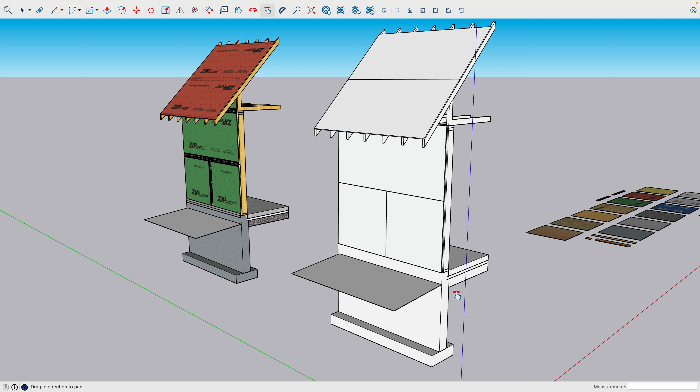As exciting as that is, it's maybe not the most helpful thing to most folks who just see this as a big white stick model. In many cases, applying texture, product names, and even the graphics of tapes gives your team the affordance of what materials you want them to use, especially when you want them to understand.

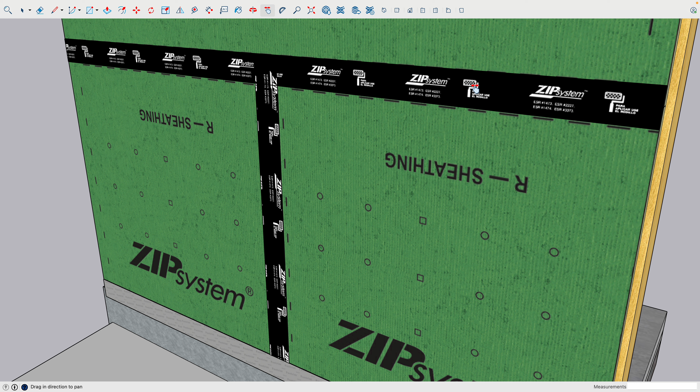In this case, you're using Zip R6 sheathing, which we'll tape to the foundation with Siga Fentrim, a primerless tape that bonds to sheathing and concrete—a wonderful product. You might specify a 4-inch zip sheathing tape as well, and maybe a 1/2-inch zip roof sheathing, or in our case 5/8 roof sheathing, communicating to the team: the reddy brown stuff goes on the roof, the green stuff with insulation goes on the wall, black tape on the zip sheathing, and the gray stuff goes at the bottom.

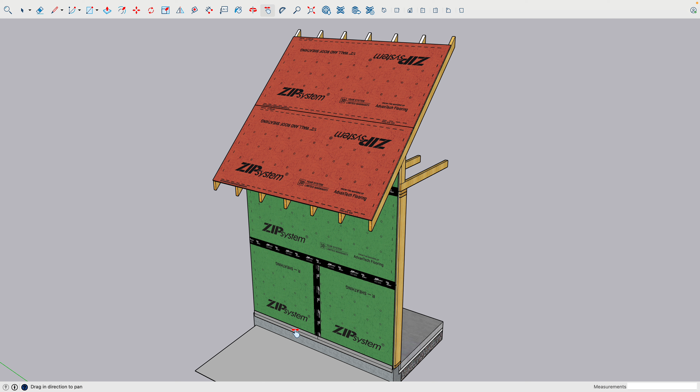Not everyone's familiar with the names of zip tape and Fentrim tape, and these things might be new to them, so colors and textures can give people a lot of support here.

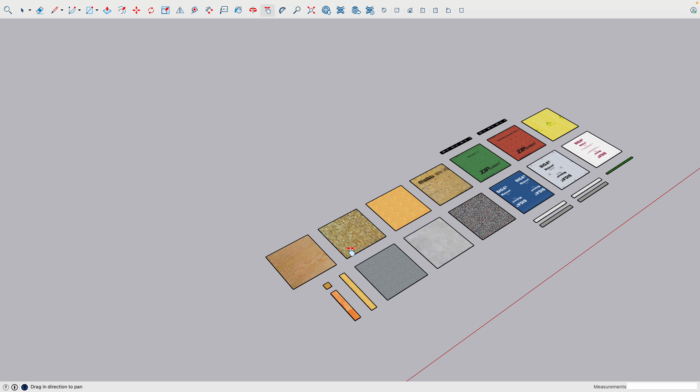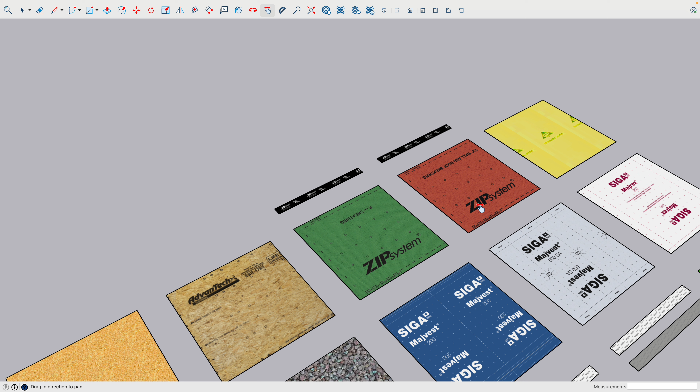In your file, you're given a bunch of textures, pre-scaled. We have plywood, OSB, particle board, and Advantech subfloor sheathing—this one is 3/4 inch. We have 7/16 zip system sheathing, and in this case 1/2-inch, but you can use the same hatch for 5/8 roof sheathing. We also have a hatch for DensGlass from Georgia-Pacific.

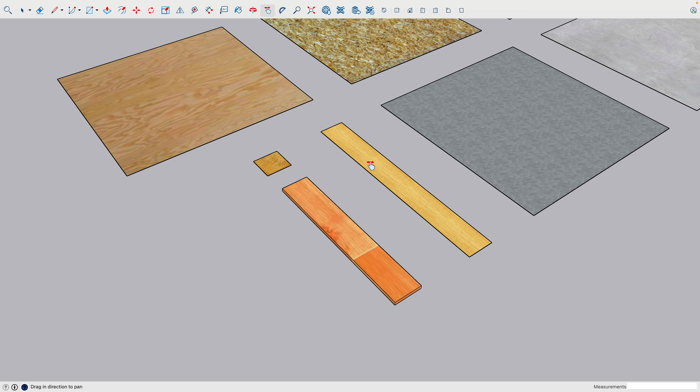For membranes, we have Siga Majrex, an interior membrane, and 500 SA, mechanically fastened, from Siga as well. There's also some gravel, concrete, conventional lumber, and this orangey one you can use for LVL.

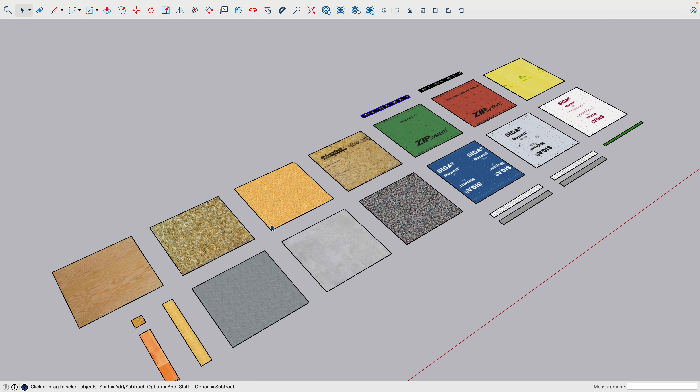Then there are some tapes here: zip sheathing tape, and for Siga's product line, Wigluv, Fentrim, and Rissan. So for today, we're going to be using zip system 7/16, 5/8 for the roof, some zip system tape, and some of the other sheet products. Let's put those into play here.

These swatches and colors don't come with SketchUp, so we have to make these ourselves. I've made these for you and put them in your file. As long as you have these textures—so if you copy and paste them from a different model into this model—it's going to give you this option.

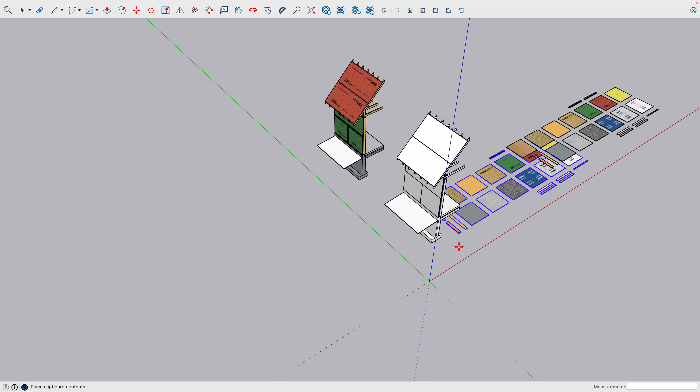When we go up to Window, then Materials, you'll notice the material menu with some default materials. If we go to the drop-down menu and select Wood, there are some lovely wood textures, but none of them really resemble things you might find in a building yard—though they might work okay. You won't find zip sheathing, Advantech, Siga's materials, or the plywood sample I have in here. It works in a pinch, but they're not the most representative of building products.

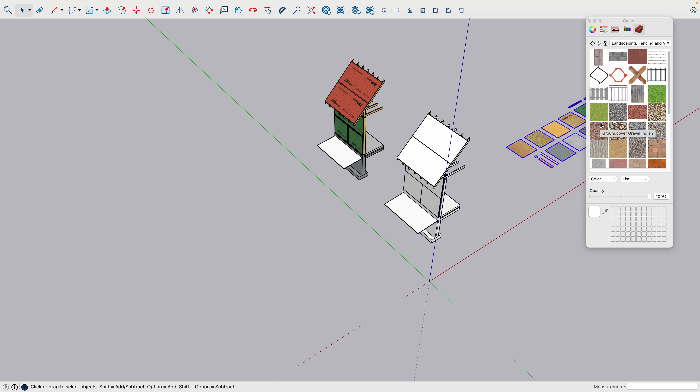Because you've copy and pasted the swatches we provided, if you go to Colors in Model, this is where those unique textures show up. As long as the swatches are in the model, they're now available to you as a color palette. So that's the first thing.

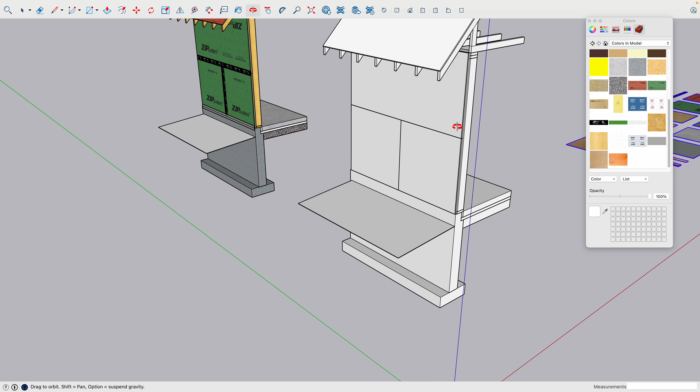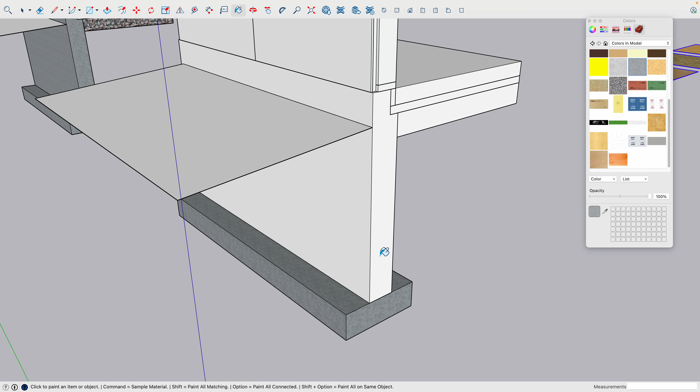Let's add some texture here, starting really easy with the foundation—we'll simply use what we're going to use for concrete. We go to Colors in Model; if your material swatch isn't open yet, go to Window, Materials, Colors in Model. We click on the dark gray concrete swatch and use that for our foundation. Wonderful. Because we want a capillary break under the slab, we use the gravel texture. For our slab itself, let's use a light gray material.

It's a different pour, maybe a different consistency of concrete, so we're kind of denoting that it's different here. And then my insulation, if you're using EPS, it is white, but it doesn't really give the affordance that it is a textured material.

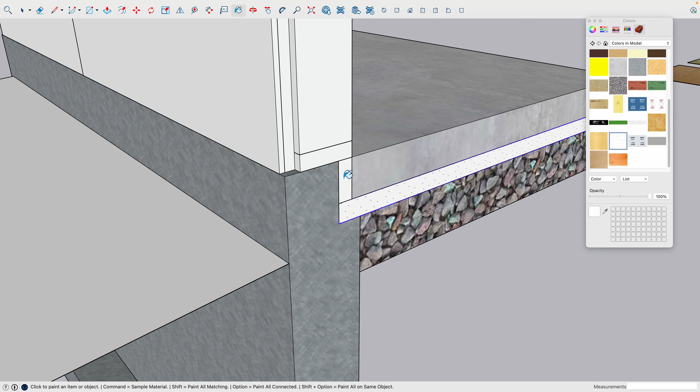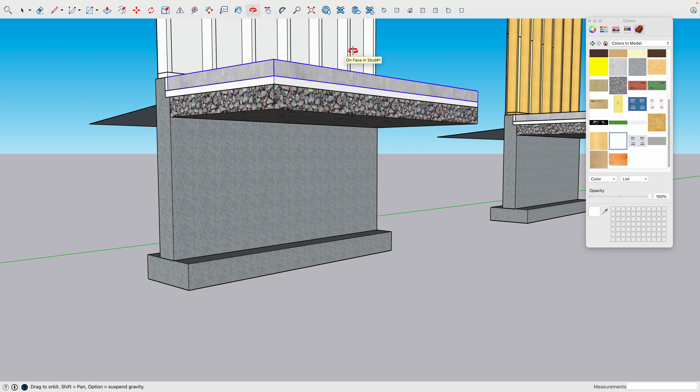So we're going to use this kind of dot hatch pattern and bucket those. When I bucket a group, that bucket applies it to every face of that group. In this case, I've grabbed this slab assembly, moved it up so you can see the bottom of it, and I orbit down. You'll notice it actually colored all 6 sides.

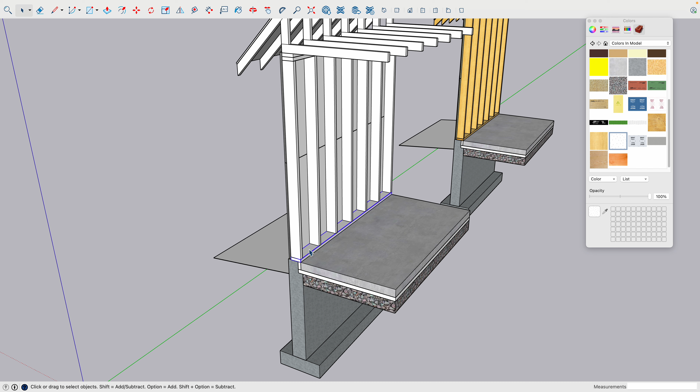If I click on the bottom plate, in the previous video we learned how to make this a component. So if I click on that bottom plate and click on the top of it again, double click into the group, and select the end face, you'll notice it also highlights the ends of the other 2 matching components, which is very helpful. So if I click out, and simply click it once, it selects all 6 sides.

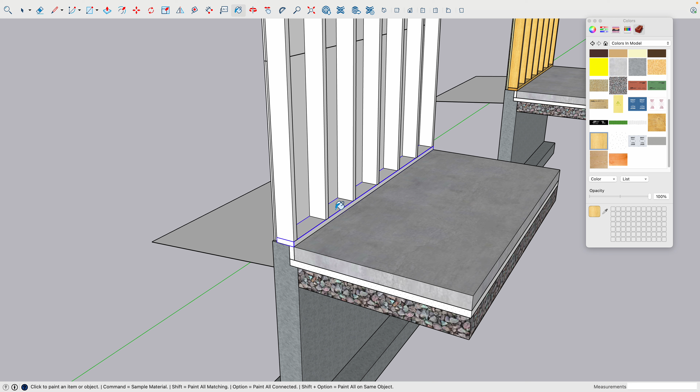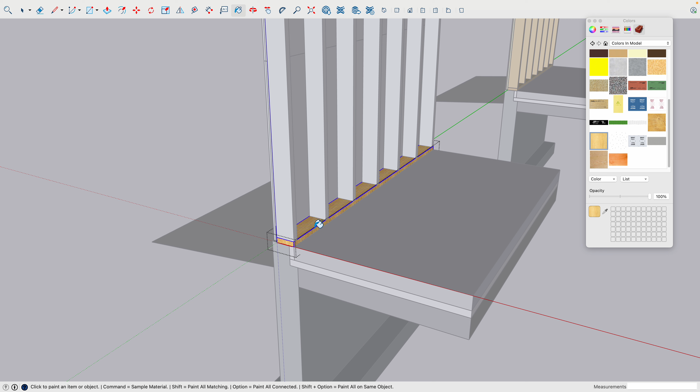I'm going to use this kind of wood texture, looks like a wood grain, and paint bucket. Let's select all 6 sides here and hit the paint bucket to get that wood. There's a bit of lag here in my computer. Okay, so if I have all 6 sides selected by triple clicking and I paint bucket, it's going to color all 6 sides.

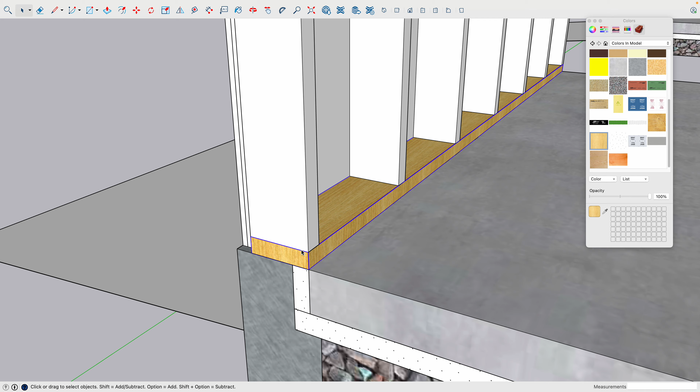That might be good depending on my level of detail. You'll notice here, because it's a component, it colored all 6 sides of the other 2 top plates. Now wood has grain and direction, so if I want to be a bit more clear that this is dimensional lumber, I double click into this group, rather than triple clicking which does all sides, and simply select the end.

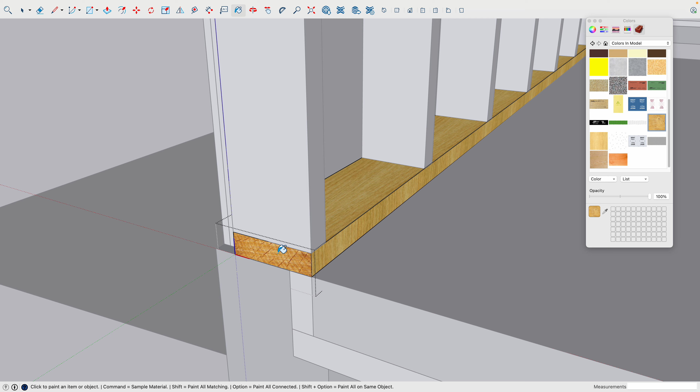I then can go up, and I've given you an end grain texture. Select that paint bucket, and bucket the end. What that's going to do is, you go up to the top, it also put an end grain on these matching 2 pieces. So it's a small detail, but it does give more affordance that this is dimensional lumber.

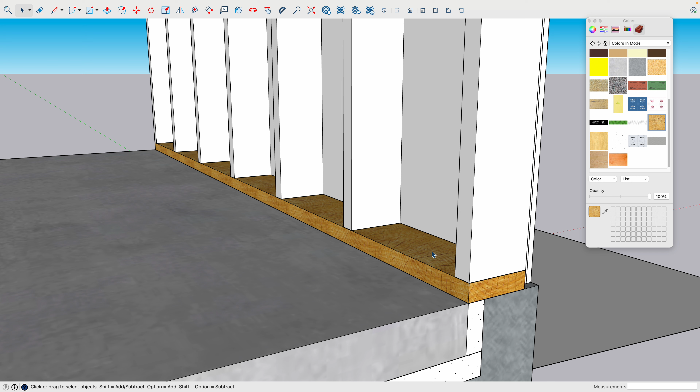So I can rotate around here. Again, I could apply that texture to all 6 sides, some lag here. Okay, I could apply that to all 6 sides, but that's really not what a 2x6 looks like. So I want that large predominant texture to be applied first, that wraps that surface in the 4-sided material, so I'm not doing it to all 4 sides.

I then go in individually to the sides that are unique, click on the different texture, just color those ends, orbit, flip around, go into the end here, select just that end, see how it's hatched here but not the sides. Again, grab that wood texture, the end grain, and hit the end.

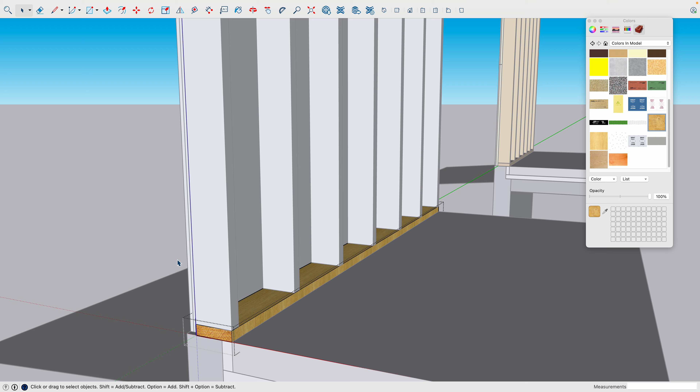Okay, same thing here on my studs. I'm going to select that component, select all 6 sides, paint bucket. Okay, works pretty well. Again, because they're components, I'm not doing all this work again.

For my roof truss, very similar. Because the predominant texture wrap is going to be that wood texture, I'm going to select all 6 sides, grab that wood texture, and paint bucket, and again it does it to every single surface of that component.

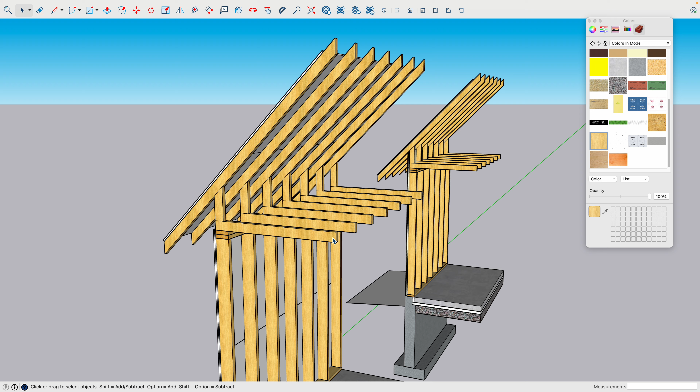Now, the bottom chords are also dimensional lumber, so I'm going to click into that component. You'll notice that every end is now hatched. That shows you that you've used component successfully. I'm going to click on that hatch pattern and just do the end.

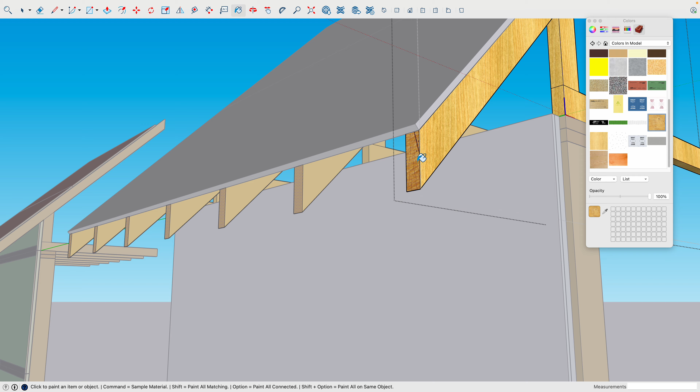And I'm going to repeat that process on the ends of my rafter tails. So I'm just going to select this one now. Same thing, do that one. Then I'm going to rotate up to the top where I have one more. Oops, not that. And there we go, you got end grain.

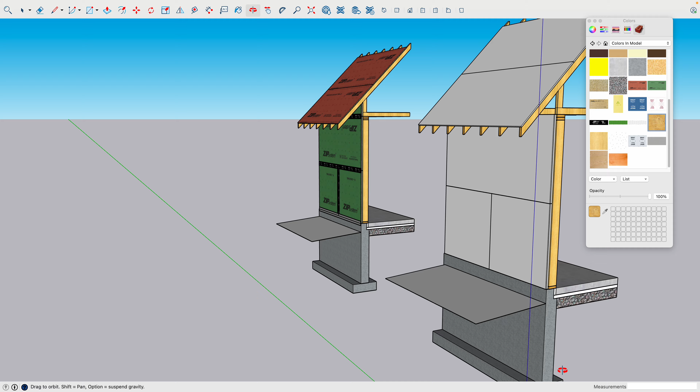Okay, so now in a couple minutes, we've got foundation. This is already more clear. This is doing a much better job communicating how this building is assembled, and for younger team members, gives them some affordance of what the materials are.

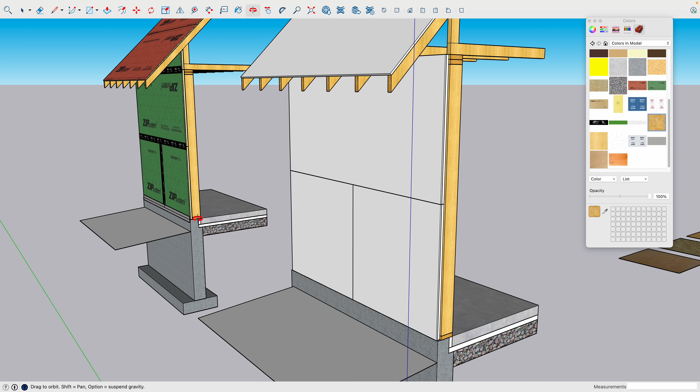Okay, pretty killer. Let's do some sheathing now and have some real fun. So wall sheathing for something like ZIP is pretty specific. It's easy to identify at the yard, it's printed, it's green. So let's make our sheathing here also reflect ZIP sheathing.

ZIP sheathing is two components, especially ZIP R. We have this integrated WRB that's printed and adhered to the face of the OSB, and then that is glued to this layer of polyiso. That's what makes it ZIP R, that's the insulated sheathing part.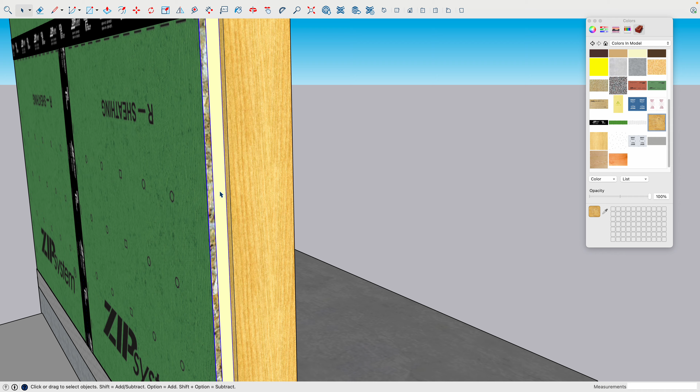So we're going to make this our sheathing. For the polyiso component behind, I'll click this first smaller half sheet, then double click again to select just the back polyiso piece. In this color lineup, there's a yellowy color here you can use for polyiso, not quite white, not quite yellow. Triple click to get all 6 sides of that shape, then paint bucket that.

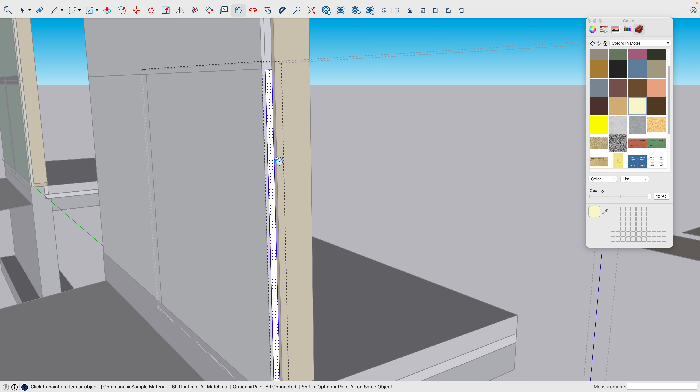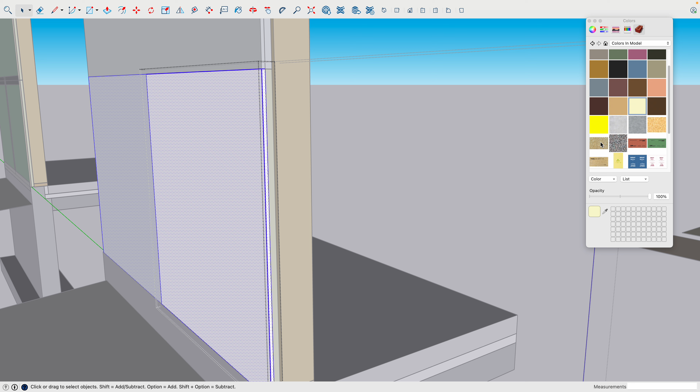For the building face itself, this is now the sheathing. I can triple click to get all 6 sides of the sheathing layer of that component, and the bulk material I want to wrap all 6 sides with first is this OSB texture, which is oriented strand board. But we know that zip sheathing has a unique face to it.

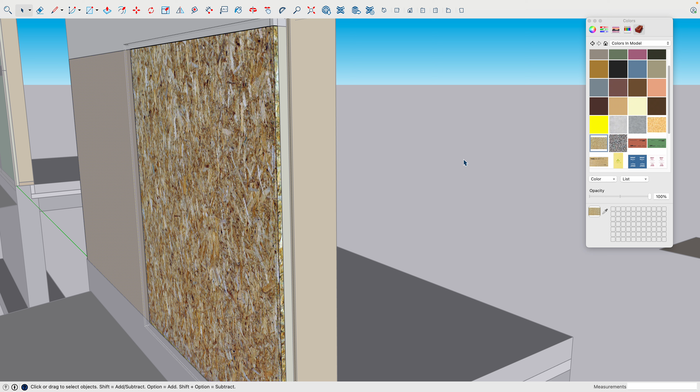So once I've painted all 6 sides of the sheathing layer, I then just select the front face by clicking on it once more, then one more time, and you notice now it's just selected the face. So if I go back to the zip sheathing material and paint bucket, it just does the front.

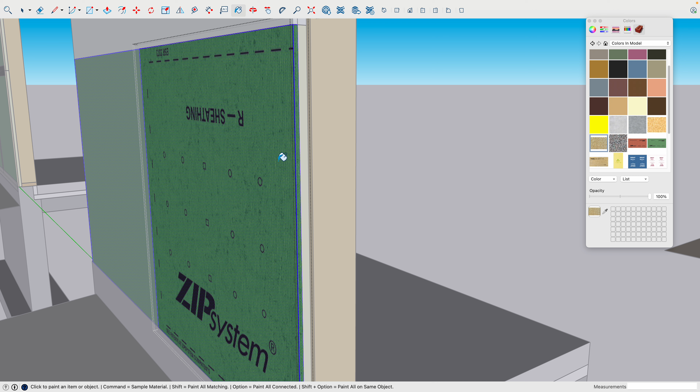If I had all 6 sides still selected - see how the front here is hatched and so is the side - and I went to my green bucket, it's going to wrap all 6 sides. I don't want that. I want the edges and back to be OSB, so I paint bucket that first. I then select just the front, get my zip sheathing texture again, and paint bucket just the front.

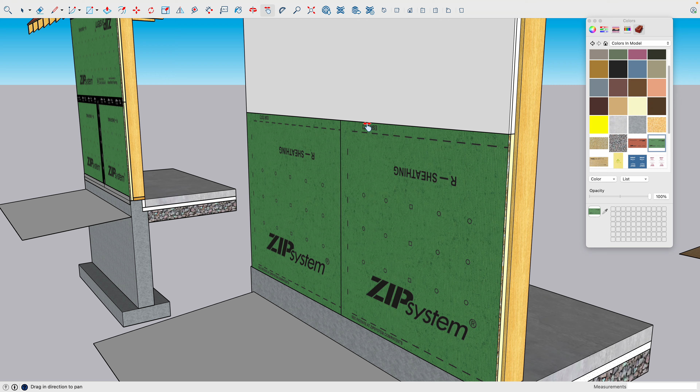Okay, now if I double click out, boom, components, right? Because I made components of a half sheet - the unique version of that full sheet - I'm able to duplicate my work. The top one is the same process.

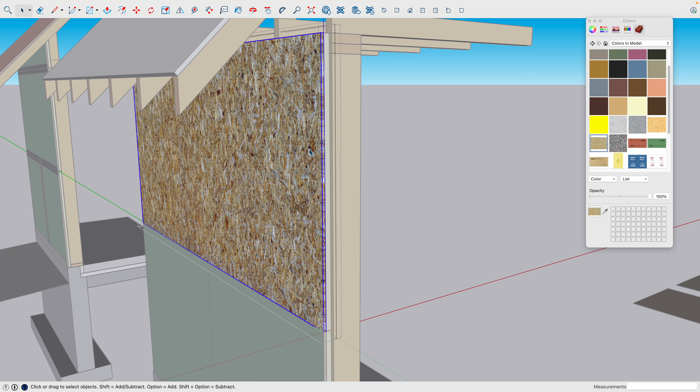I'm going to select all 6 sides of that back group, go to this kind of gross yellow color for polyiso. I'm then going to select the front copy, all 6 sides of it, click on the OSB texture, select just the front face, and then drop the zip on there. Already this is doing wonders for us to communicate what this sheathing is, what product you want your team to do, and maybe even the sheathing layout you want them to mirror.

Okay, let's do the roof now. Roof is pretty darn the same. We're going to select this roof sheathing. You'll notice here, when we copied this, we did not make a component - we simply moved and copied it.

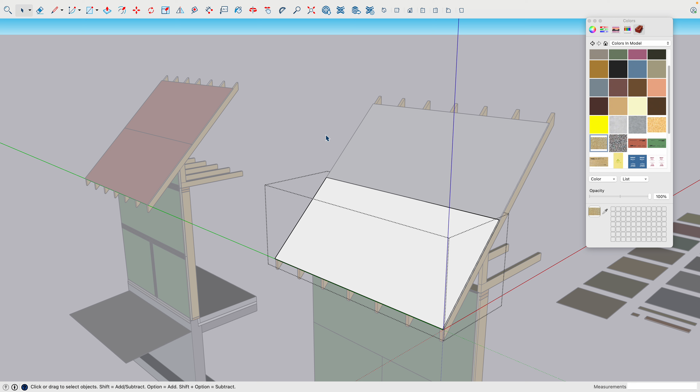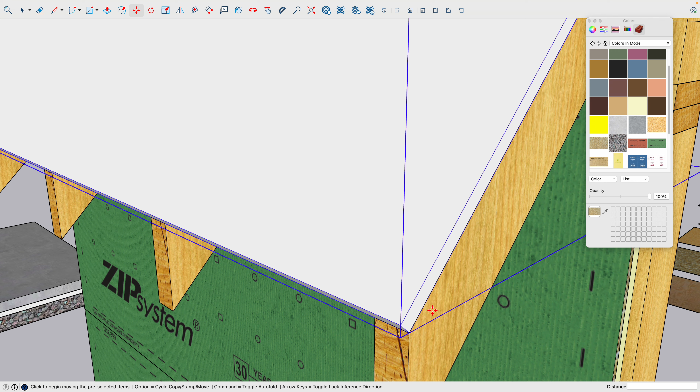So if I go in here and apply all my texture, it's not going to copy it. If I made that mistake, I could simply grab that upper sheet, delete it, right click, make that a component, and call that 5/8 roof sheathing. I then go in and move-copy - M option, or move control on a PC - to move and copy that up so I have 2 components of that zip sheathing, so when I do this work, I don't have to do it twice.

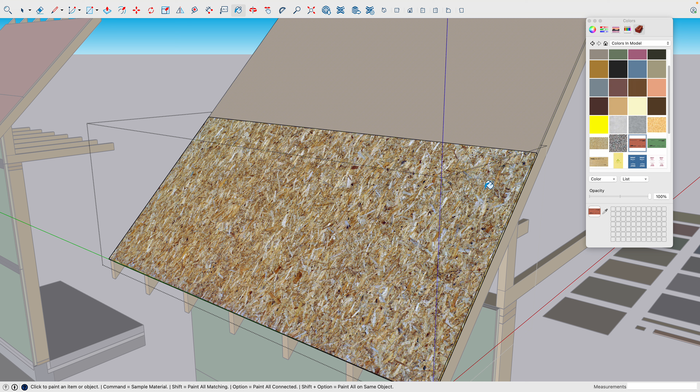So now I go in and select that sheet, all 6 sides - triple click to get all 6 sides. I paint bucket that first one because I want that texture to apply to all sides of that OSB. Now I just select the front face, hit spacebar to exit that command, select the front face, then pick my roof sheathing texture - the kind of orangey, browny red one - and paint bucket. There we go, so this is working pretty well.

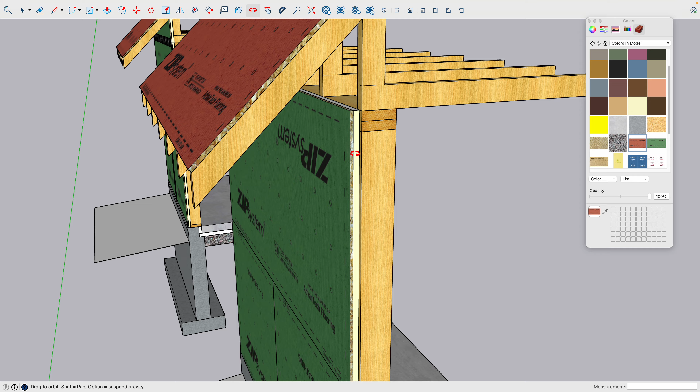This now communicates, you know what, it's a different product on top, different product down below. We've textured or at least added some color to that polyiso so it's not quite white, and even down here with our EPS layer, we've textured that with a hatch to show this isn't just a white box, something closer to EPS. The last thing we can do here is start to show our team members, and we'll do this in future workshops.

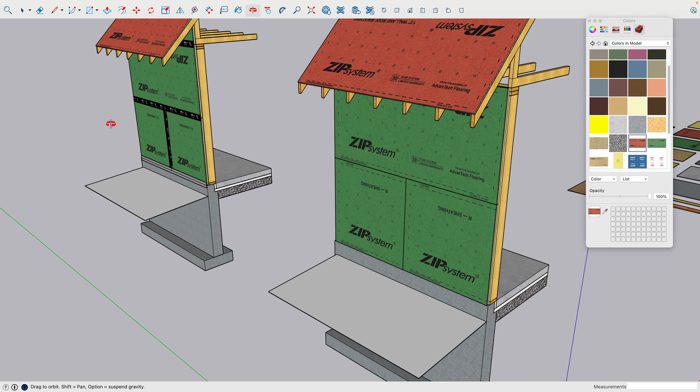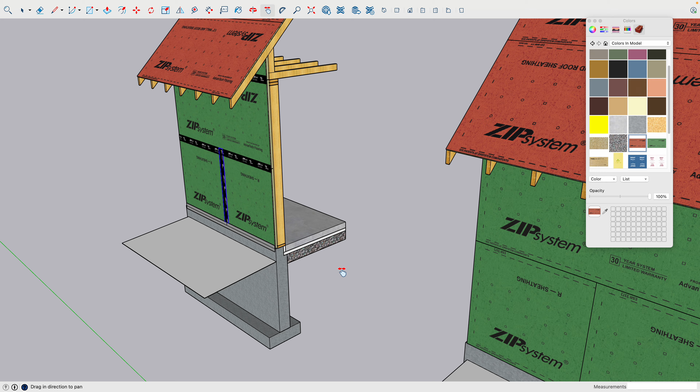We're going to go into our model, and I'm not going to select any group. I'm going to draw on the face of these groups using a guideline, so hit T for tape. I'll find that horizontal seam in my zip sheathing, click on the edge, and pull up in the blue axis. I could hit the up arrow to stay constrained, or just go up. I'm going to set that guide 2 inches off that seam, and you notice it aligns with the texture. We've scaled the texture so it fits perfectly on a 4x8 sheet.

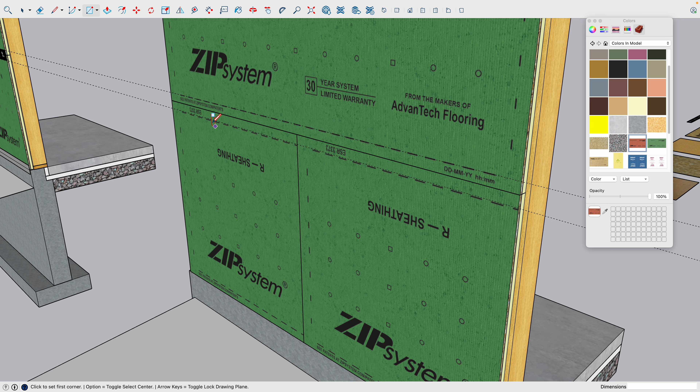I'm going to snap again from that seam line, come down in the blue axis 2 inches. Then I'll go to rectangle and trace from where the guideline intersects the outside edge to where this guideline intersects the outside edge. It of course makes a new surface because I've drawn on top of those groups, not in the groups. So now if I triple click this new surface and boundary, I can right click, make group, double click to select it.

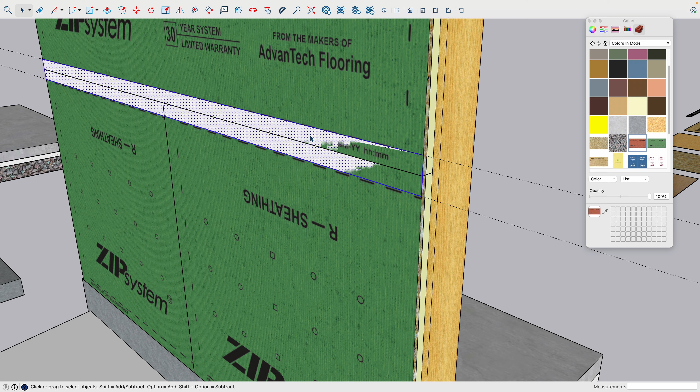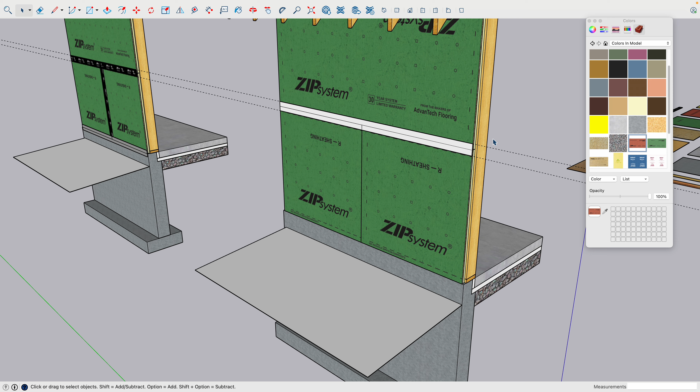Let me try it again. Double click to select it, hit P to push, and we're going to push it out 1/16, so 1/16, enter. You'll notice that if I don't apply thickness to something like tape, even though tape has almost no thickness, SketchUp doesn't know which surface we want it to currently model.

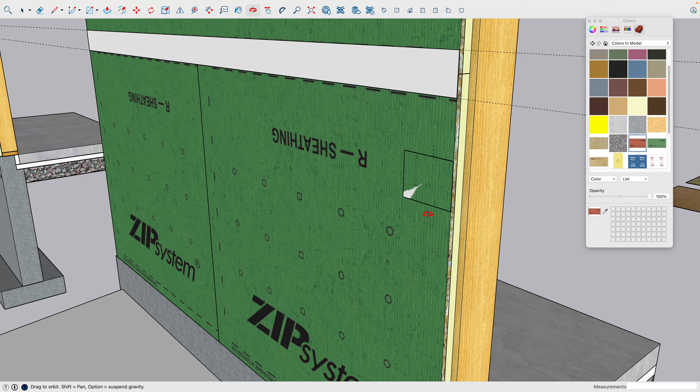Do we want it to show the green layer or the white one? Because they're in the same plane, occupying the same space, it kind of has a panic moment and shows you both at once. Not so helpful. If we were to go in here and apply our zip tape layer to that, it doesn't really work, right? It's also why sometimes it's hard to select, because you're selecting the same plane.

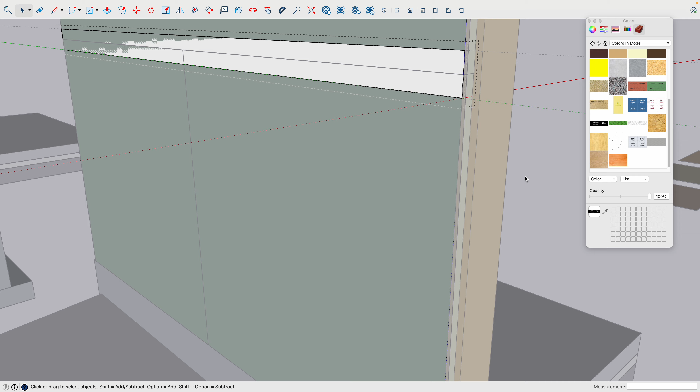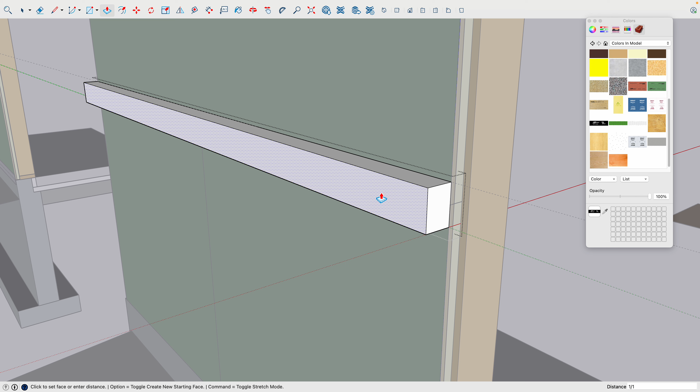So instead, when we made that first outline, pivot around until you can see more of that white shape. When you double click, you're selecting the surface and the boundary of that new plane. Right click, make group, double click, P for push, and we're going to give it thickness, 1/16. This means we've drawn basically a very flat rectangle in front of our sheathing, and that's going to allow us to apply texture.

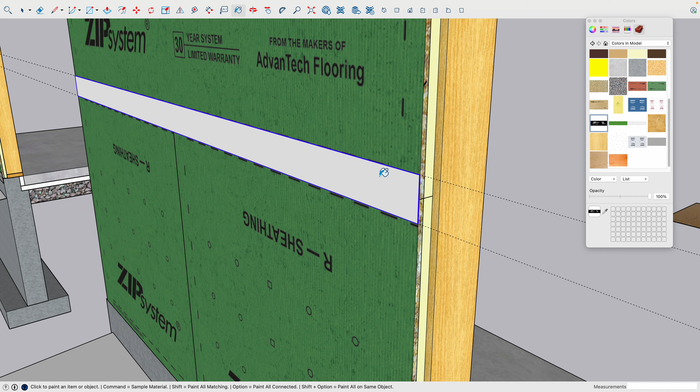So I'm now going to select all 6 sides of it, click on the zip tape material swatch, wait for my paint bucket lag to process, and then click, and boom, okay? You have just flashed your first sheathing layer or sheathing seam line in SketchUp. There you go. Let's do the bottom now.

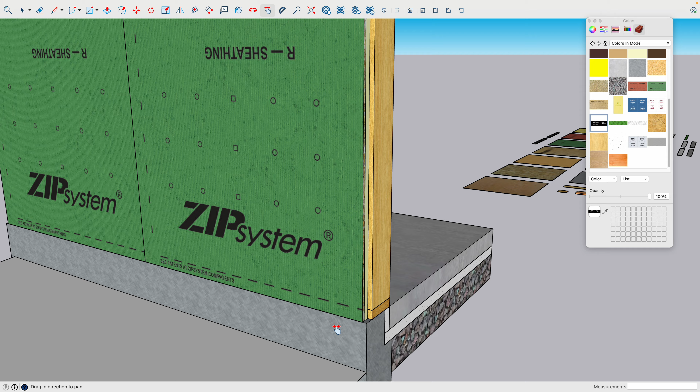Let's use some fence trim down here, something a bit different. I could do the same thing, come down here and do my same alignment, come up 2 inches, enter, come down 2 inches, make a shape, but I don't have to do that. I could simply go and grab this layer of zip tape, click on the group. The blue boundary is going to help you find it. I'm going to hit move and copy.

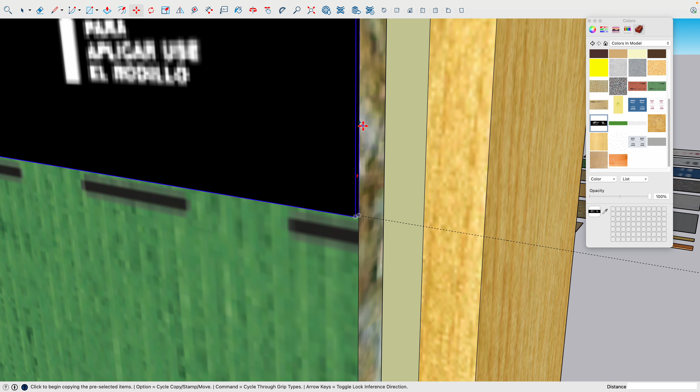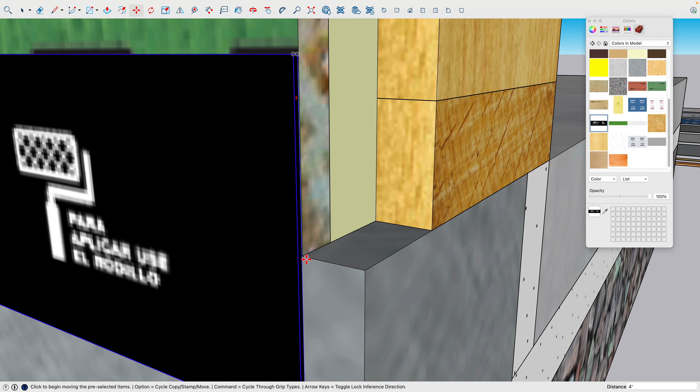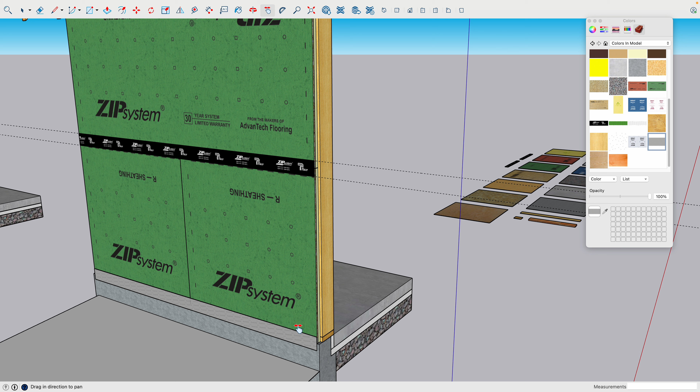Depending on the scale of your model, since I don't have this piece of tape replicated anywhere else, I don't have to make it a component yet. If I'm doing an entire building, I probably want to do these separately. Now let's do this last piece in the middle here.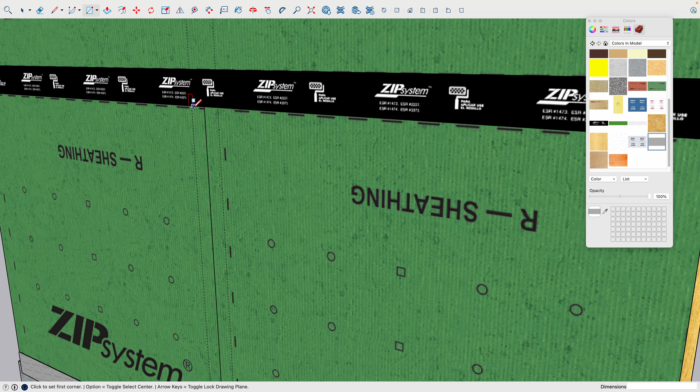That's the same process again. I hit T for tape, come over 2 inches in the green axis, go over 2 inches again in the green axis. I hit R for rectangle, go in here, start from here, and come down to the bottom. There we go.

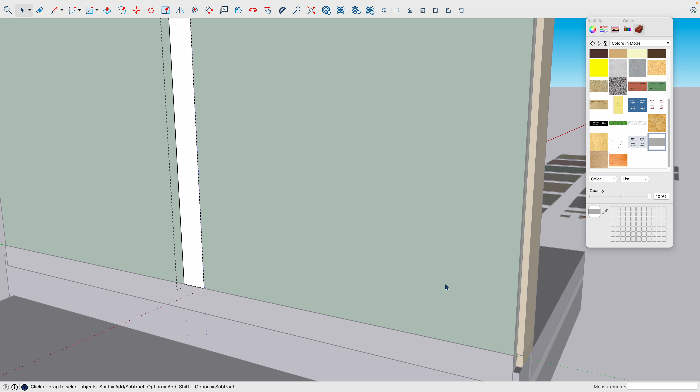Orbit until you find a bit more of that white showing, so it's easier to select. Triple click, right click, make group. Double click, select the face. P for push, pull it out 1/16 - tapes need thickness to really see them. Now select it, apply your zip tape, and there you go.

You'll notice here, SketchUp doesn't know that's a single graphic - it sees the image of the zip system tape as a texture. It doesn't know you want that tape to actually run vertically.

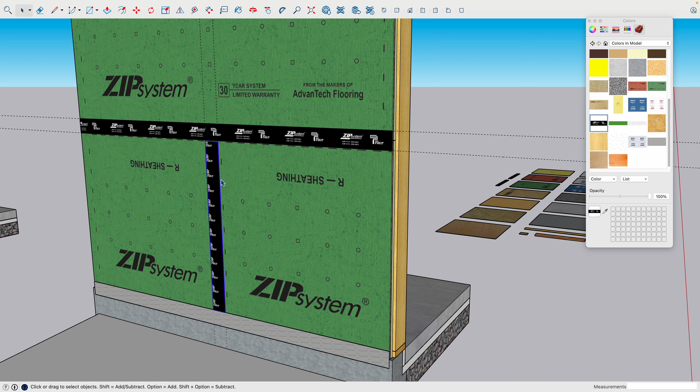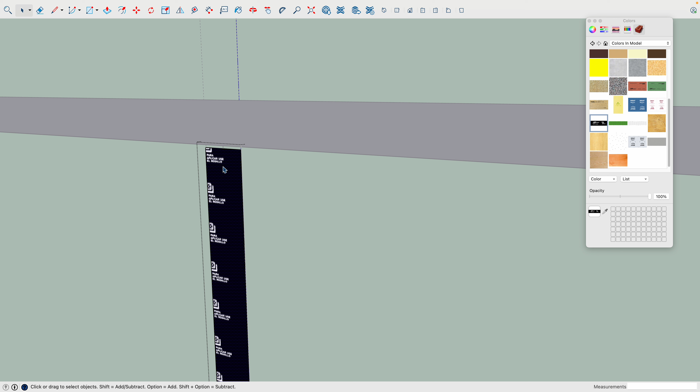So what we need to do is rotate this last texture. To do that, I have to change the operation. Right now we've taken this hatch and applied it to all 6 sides, because when I triple clicked that shape and painted it, it wrapped it on all 6 sides. So when I select this front face only and right click, I'm not given the option to change the texture. When I want to rotate or adjust any texture's orientation in the model, I have to apply it to just one side of the sheathing.

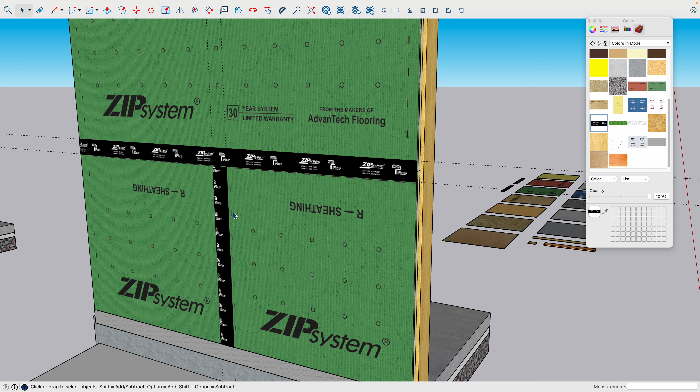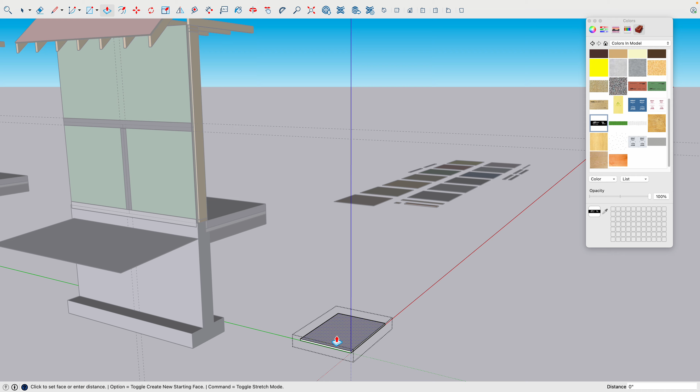Let me show you how I do this on a little model next door here. Let's make a block - just a rectangle on the ground, like so. Double click, right click - oops, triple click, right click, make group. I'm going to push it up, let's push it up here, I don't know, 2 feet. Okay, so we've got a square.

Big old square. I triple click all 6 sides and apply, let's use the zip sheathing so you can actually see it. Okay, and it wraps the box. That might work okay for us, but let's say on this front face I want to run that sheathing vertically - I probably want to show the sheathing texture going up the wall versus side to side.

So to do that, I have to select just that front face I want to rotate, and I'm going to paint bucket it again. Okay, just the front face. Now, when I right click with the paint bucket tool on, after painting just that face, a new dialog shows up - a texture dialog called position.

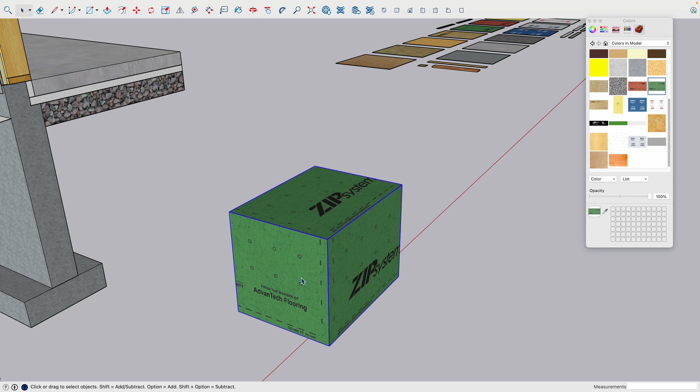You'll notice on the sides that I didn't paint on their own, if I right click them, it's harder to change that position. So I need to select that face only, apply that texture, right click, go to texture, position, okay?

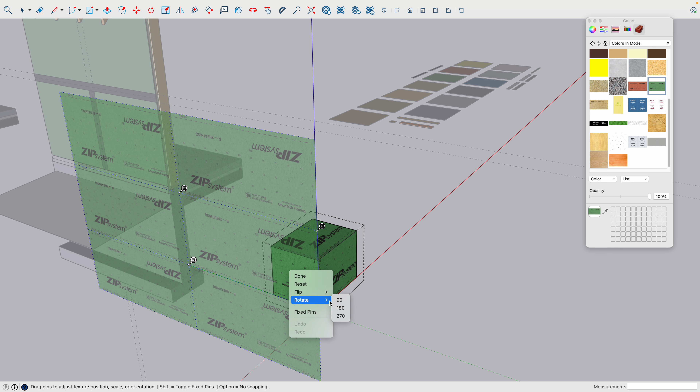Now you can see that's the full swatch, what it looks like when it replicates. And now I right click again, go to rotate, and rotate it 90. So now that swatch is going left to right on the side and then up and down on that front face. So let's do that to our tape here.

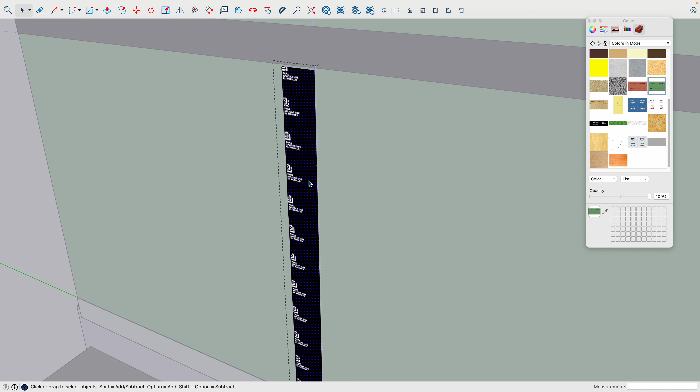We're going to double click into our group, select just this front face - and I can verify that because just the front face is hatched. I'm going to make sure I've just paint bucketed the front with that texture. Right click, texture, position, right click again, rotate 90.

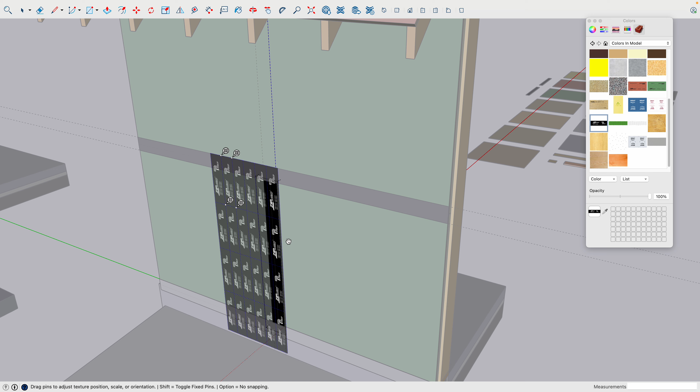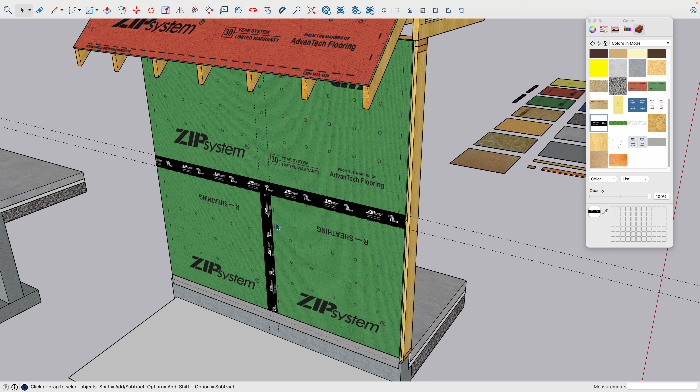Okay, zoom out to verify it's good. Hit spacebar to deselect, then click out of the group. Now I've successfully rotated the tape, showing your team I want this to roll this way. Using that texture rotate tool might be helpful for you, especially with textures that have graphics and lettering that reads left to right.

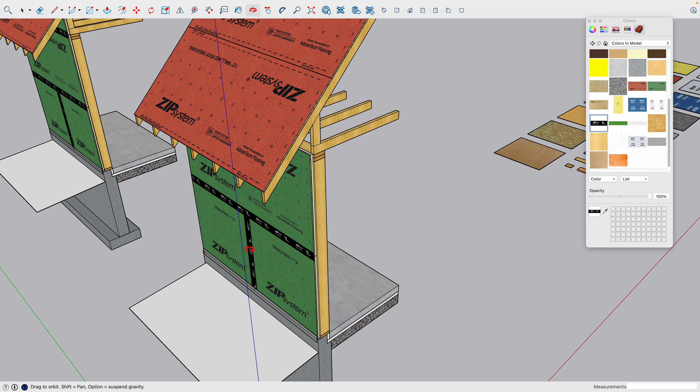Okay, so that's the end of this assignment. Again, you want to go up here and clean up your model - edit, delete guides - so that your finished model has a textured foundation, slab assembly, wall framing, truss framing, roof sheathing on top, and wall sheathing down here. For added bonus, go ahead and throw a row of tape on that zip system roof sheathing product to make sure you're weather tight before the weekend. Okay, good luck.